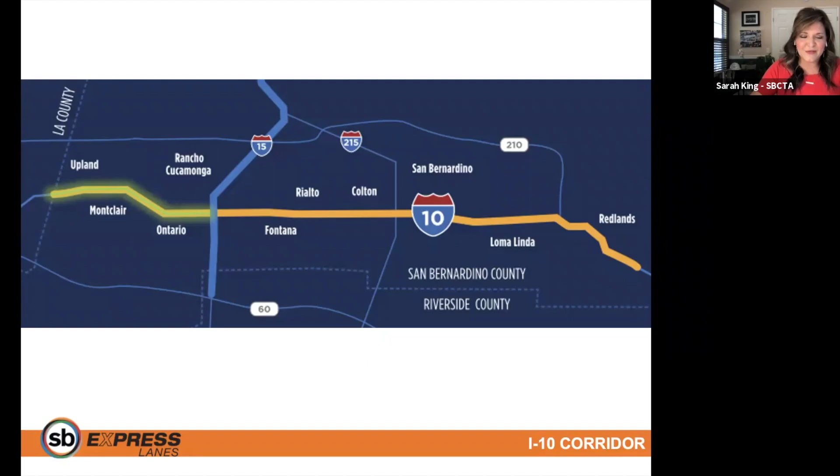Construction broke ground in spring 2020, and prior to construction starting, the I-10 looked a little bit like this: 4 general purpose lanes, an auxiliary lane to assist drivers with merging on and off the freeway between ramps, a shoulder, and 1 high occupancy vehicle or carpool lane.

The project will keep the current configuration with no changes to the 4 general purpose lanes, but we are adding 2 tolled express lanes in each direction and a shoulder, where the 1 HOV lane currently is. Construction is anticipated to be complete in 2023. Funding for the first phase has been secured from federal, state, and local resources, including Measure I, San Bernardino County's half-cent sales tax for transportation improvements.

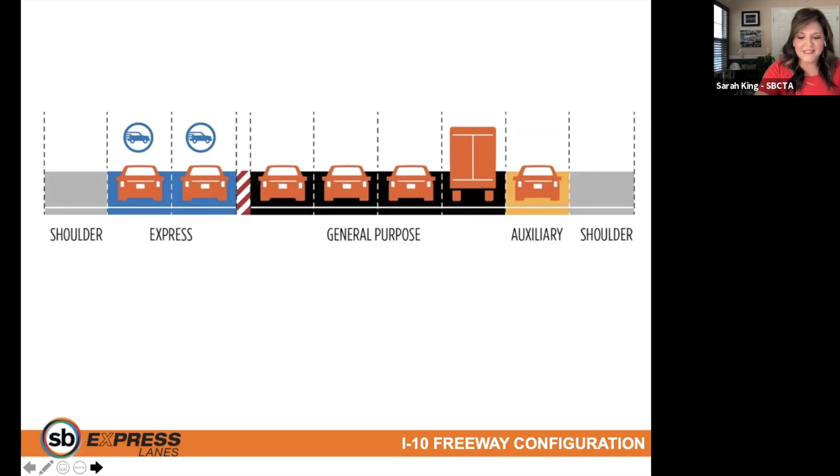Express lanes aren't new to Southern California. However, the I-10 express lanes will be the first express lanes within San Bernardino County.

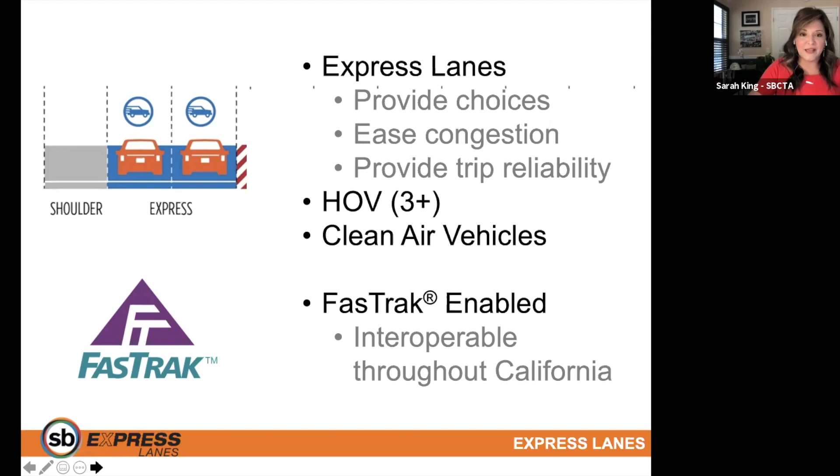Since spring of last year, crews have been hard at work building the first phase of the SB Express Lanes project. Construction occurs during daytime and nighttime hours and involves work in lanes, on and off ramps, along the shoulder to the freeway, and even local streets and roads.

For those of you who responded to our icebreaker poll before we officially started our presentation, the answer is 18, as you see here on the slide. There are 18 bridges within the 10-mile corridor that are either being replaced, widened, or improved to accommodate the widening of the freeway to add the express lanes.

Retaining walls and sound walls are also coming down and going right back up, and crews are rehabilitating the main line, and lots of utilities are being relocated. For those of you who responded for living within one of the corridor cities, you may have experienced lanes shifting or being narrowed, and even seeing construction vehicles entering and exiting the freeway as part of this project.

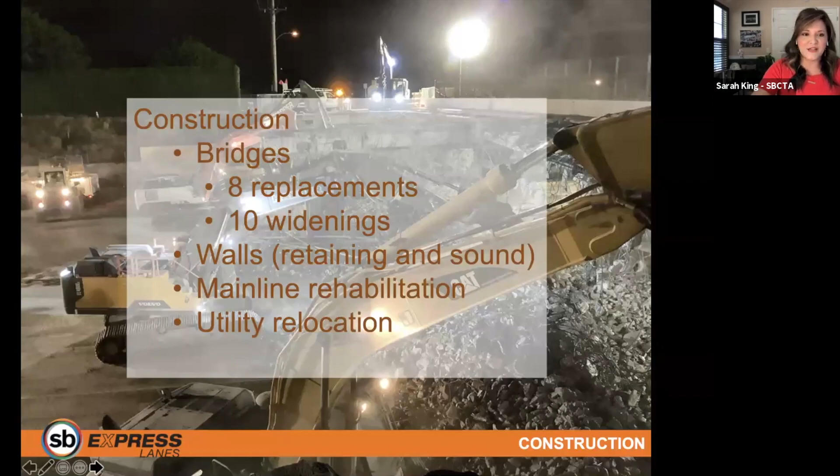Now, with construction progressing, the project team has scheduled a series of 55-hour weekend directional closures on eastbound and westbound I-10. These closures usually start Friday night at 9 p.m. and extend through early Monday morning, opening back up to the public by 5 a.m. They are scheduled for the next few weekends, except Easter weekend, and will occur over the next 2 years.

This allows crews to remove and repave portions of the I-10 freeway and perform major construction activities. Construction is dynamic and schedules may change, but all real-time closures and detours can be found on the project's Google map at go.sbcta.com/I-10corridor. We encourage you to plan ahead during construction.

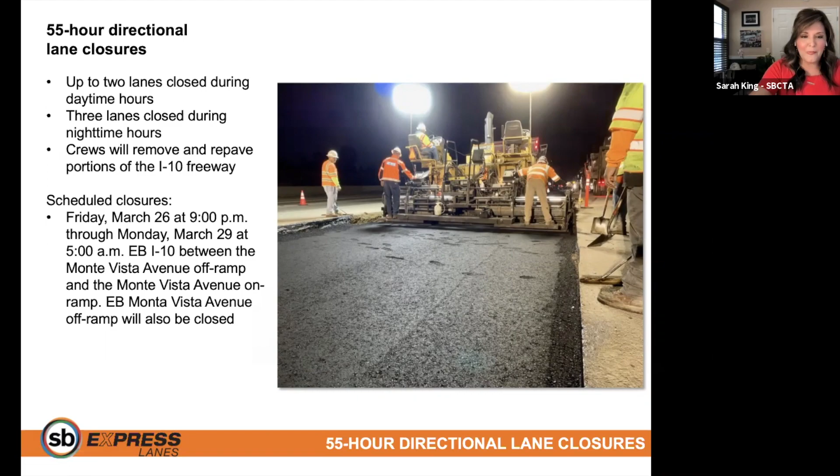Now, before we jump into our focus for this month's webinar, which is our bridges, I wanted to give you an update about our work on the retaining and sound walls and local street and lane closures. Because we're widening the footprint of the freeway, our crews need to take down and rebuild all the retaining and sound walls between you and the freeway. As part of this work, they are also relocating utilities and removing trees on several local streets adjacent to the I-10.

You may have seen a sign similar to the one in the photo here if you live within the corridor. While your commute on the I-10 may look different from week to week, it also might look different on your local streets, because of these closures and activities. These street and lane closures are needed to allow our crews to work safely and get through widening the freeway. But this specific work, as it relates to retaining walls and sound walls, takes place during weekdays only, during both daytime and nighttime hours.

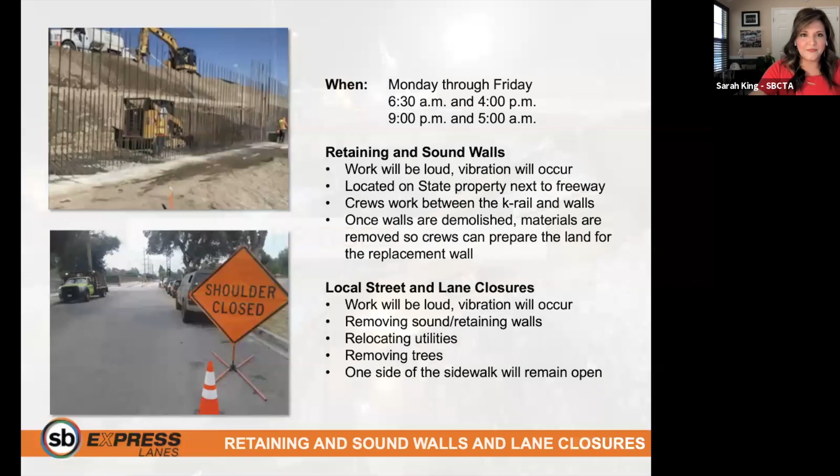So now we're going to jump into the focus of today's webinar, which is our bridges. Today, we're working on about 11 of the 18 bridges within the 10-mile corridor, and the next handful of slides will give you a glimpse into the life of this active construction project. Work on the bridges can be loud, and for those of you living within one of the corridor cities, you may feel vibration from the bridge activities during both daytime and nighttime hours.

Joining us is AJ Abascal from the Lane Security Paving Joint Venture, the team that is building the project on behalf of SBCTA. Hi, AJ.

Hi, Sarah. So we're going to make this a bit of a back and forth dialogue, and I'm hoping that you can help explain to our webinar guests, and those who will watch the recording after the webinar, what it takes to widen and reconstruct the bridges on this project.

Sounds great. So on our first slide we have closures and reduced lanes. Shutting down streets or freeways, we understand, can be an inconvenience to those who live nearby or are headed out the door to work. I myself have been detoured around a construction activity before, but help me understand, why do we close some bridges while others remain open but have reduced lanes?

Sure. So typically on this project, the bridges that we do close are the smaller ones. They're 2 lanes wide, 1 in each direction, serving the smaller local streets. The bigger ones, such as Euclid or Vineyard, have multiple lanes in each direction, serving some of the more major local streets, and those are the ones we try to keep traffic flowing through. So we'll do those in different phases.

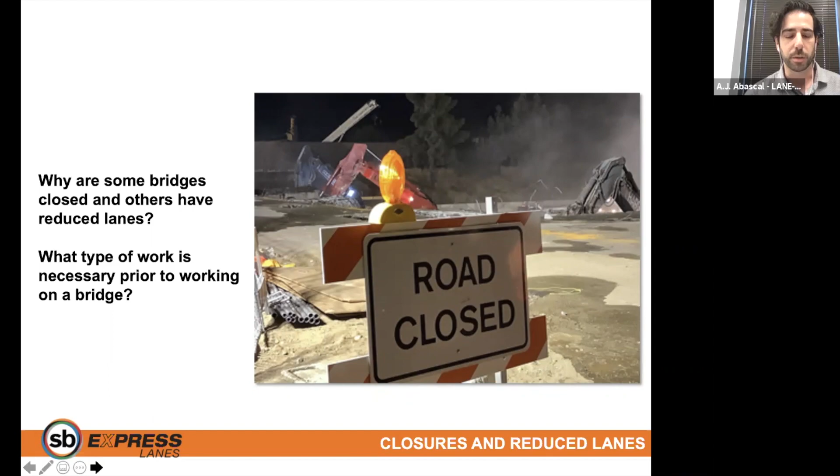So those are, in general, the things that we'd like to do as preparation for beginning any work on bridges. So definitely a lot of deliberate coordination and intent put into this before shutting it down.

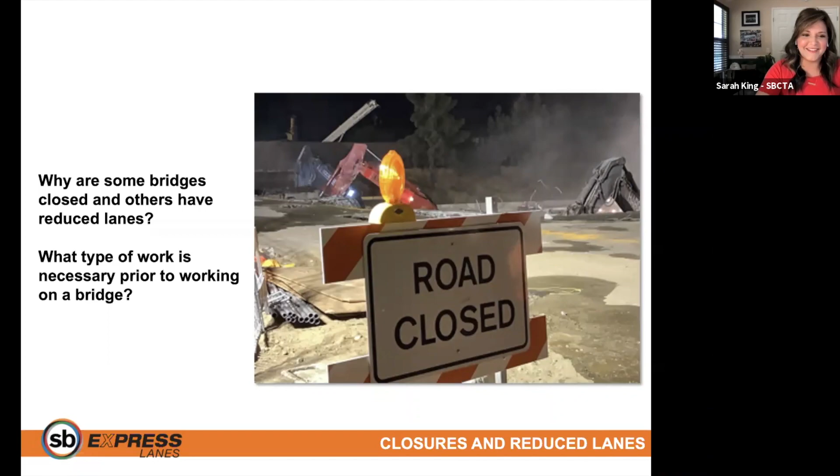That's right. All right, so that's a good segue because our next slide is utility relocation. So I think of utilities for my own home: water, power, cable, internet. Are these the same types of utilities that need to be relocated? The way I like to think about utilities is it's just any commodity that gets distributed from one place to another - water, gas, electric, cable, and so on.

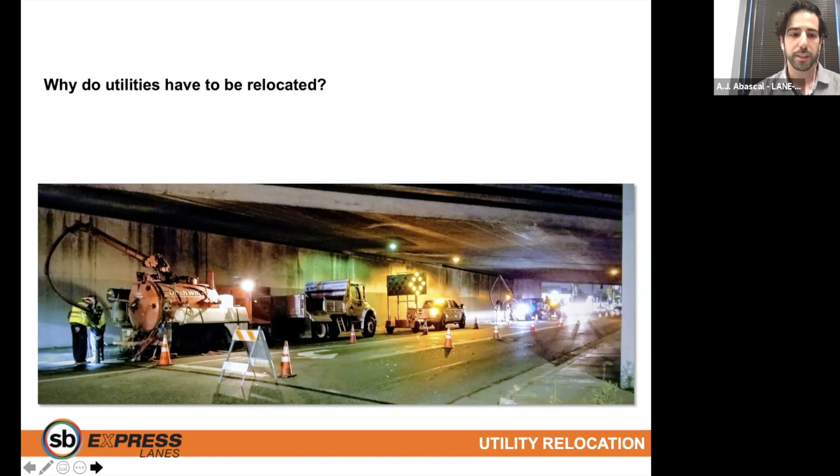Yeah, sure. So again, we start with our traffic control. This is more temporary, as it usually only stays in place for a few hours while we're doing the actual demolition of the bridge. But that's the first thing we want to set up, and it's basically to help detour or reroute traffic away from the demolition activity itself, for both the public safety and the safety of the workers.

Once that's in place, what we'll do is bring dump trucks loaded with material, earth, dirt, and dump it just underneath the actual bridge itself, basically creating a protective pad. That helps protect the existing pavement on the freeway so it doesn't get damaged, since you're talking about tons of concrete falling on the ground. So we want to keep that protected as best we can. That's what we typically start off with.

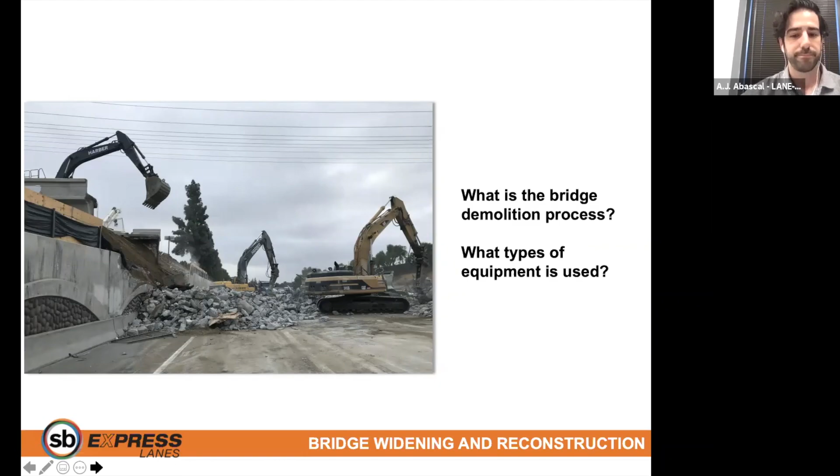Can you help explain some of the terminology here: abutment, bent, column, deck? An abutment, which you can see at the far end of the picture, is basically the foundation of the bridge, supporting the top on which drivers drive. Abutments are only at either end of the bridge, whereas bents are similar but in the middle. Depending on the length of the bridge, you may need multiple bents to support its weight and the traffic. On this project we have either 0 or 1 bent per bridge, but elsewhere you could see multiple, just depending on bridge length. Columns are basically part of the bent system and help support the bridge between the abutments. The deck is basically the surface of the bridge that traffic drives on.

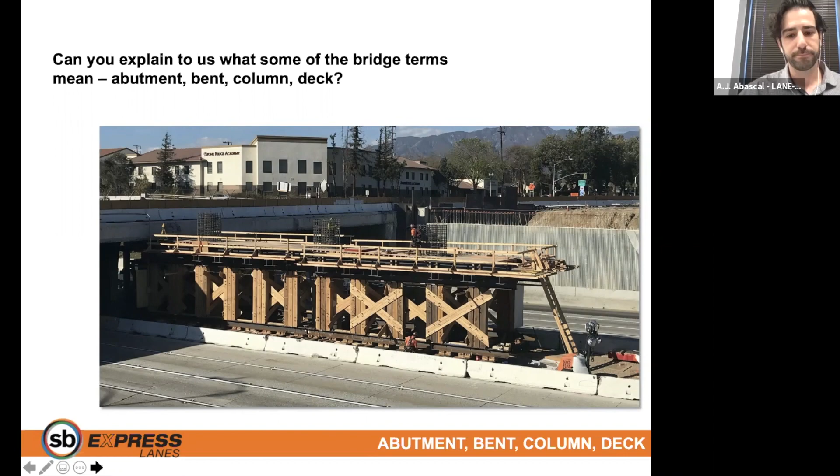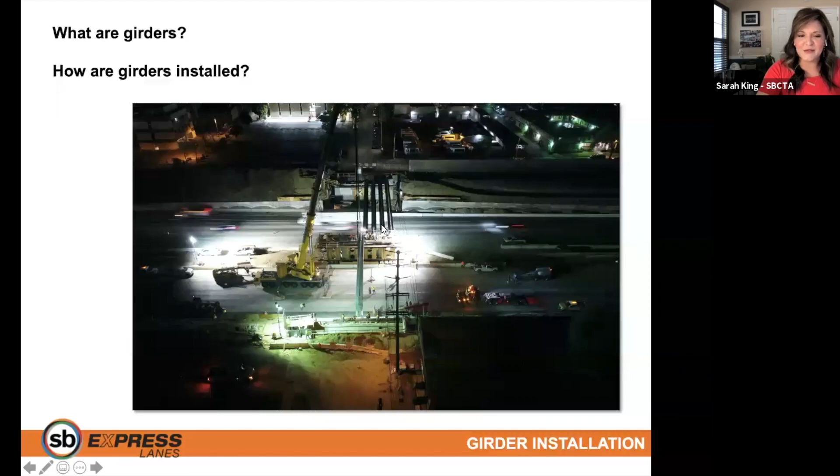So testing my knowledge on the slide you just described for abutments — the abutments are here on the outside of the bridge, correct, and our bent is here in the middle? Yes. And these concrete beams you mentioned are the girders? Yes, ma'am. Great, thank you.

Once that's done, we do the deck pour, which usually takes a night or two for bridges this size. It's also quite tedious — you want to be really careful because you're creating a nice, smooth, drivable surface. If you're not careful, that's why we're so careful doing that kind of thing. So there's precision needed for the end user.

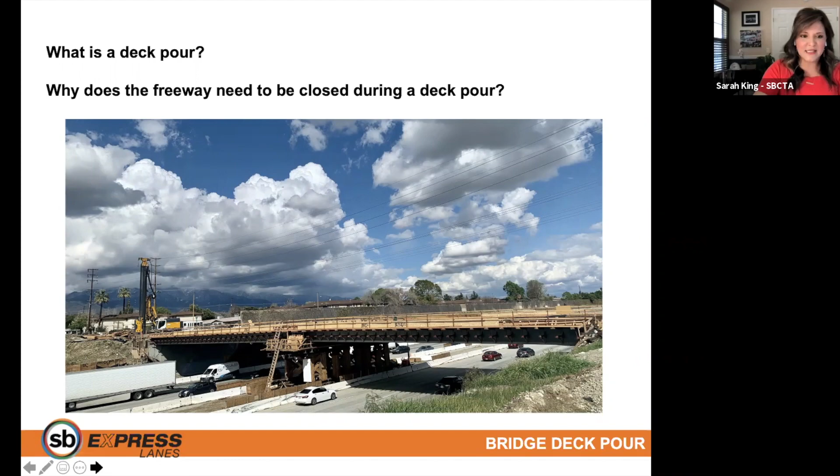So our next few slides, we're going to give our webinar guests an update on some of the bridges. Thank you, AJ, for explaining the various stages of taking a bridge down and building it back up. I know we made it look pretty simple in just a few slides, but there's obviously a lot of crews, coordination, and equipment needed. I'm hopeful this explanation helps explain why freeway projects take so much time and coordination, and sheds some light on why so many activities occur at night.

Thanks again, AJ. So again, the next few slides are just providing an update on some of our key bridges we're working on. Crews continue to build the new Sultana Avenue Bridge over I-10, which started last year. Crews will pour concrete for the bridge tomorrow night, starting Friday night, March 26th from 11 p.m. to 7 a.m. The westbound I-10 will be closed between Vineyard Avenue and Euclid Avenue.

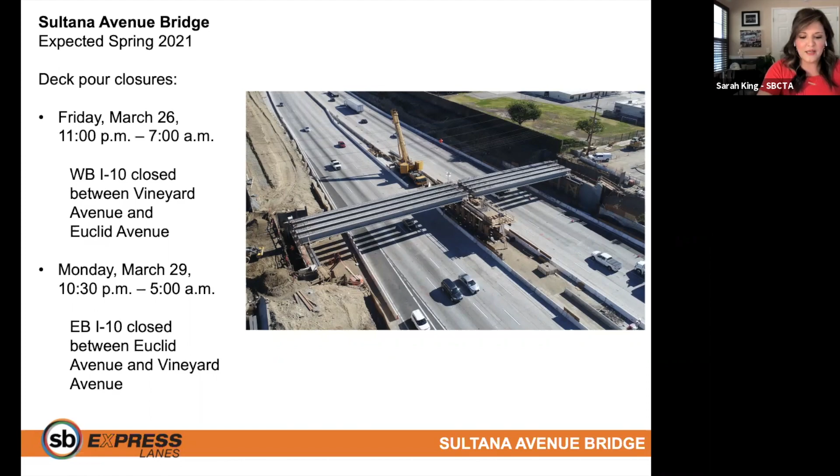And then on Monday, March 29th, from 10:30 p.m. to 5 a.m., the eastbound I-10 will be closed between Euclid Avenue and Vineyard Avenue. So motorists will be detoured off the freeway. If you're planning to travel during these times, please be on the lookout for any detour signs.

Work on Euclid Avenue began in mid-May 2020 and will last approximately 18 months. Crews demolished the east side of the bridge last year and are working on rebuilding the northbound lanes. Daytime and nighttime activity includes building the bridge supports, which is what you see here on the screen. In April, crews are scheduled to do the deck pour, like we're doing on Sultana that AJ just alluded to, on the east side of the bridge, which will require closures, and more information will be provided as we get closer to that date.

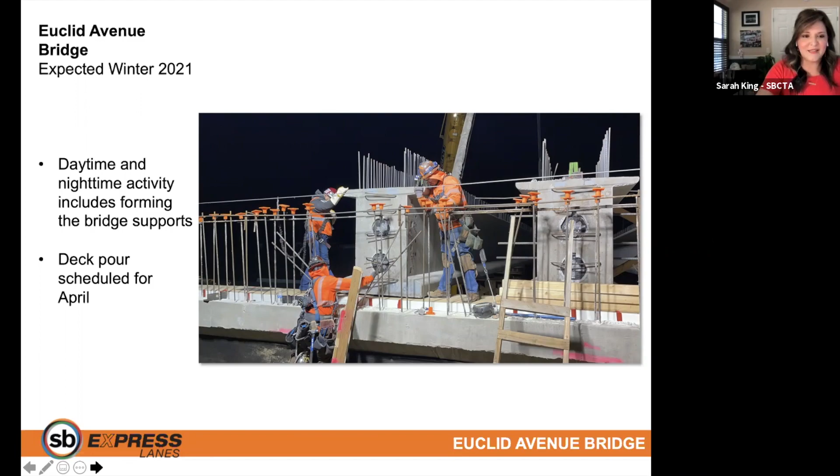So we will end our bridge highlights section with Vineyard Avenue over I-10. This bridge will be replaced in a two-phase process. The east side of Vineyard Avenue over I-10 was partially demolished in early March, and that's the photo you see here on this slide. Construction will last approximately 18 months, expecting to be open to the public in fall of 2022. Daytime and nighttime activities include installing temporary support structures, drainage, and earthwork.

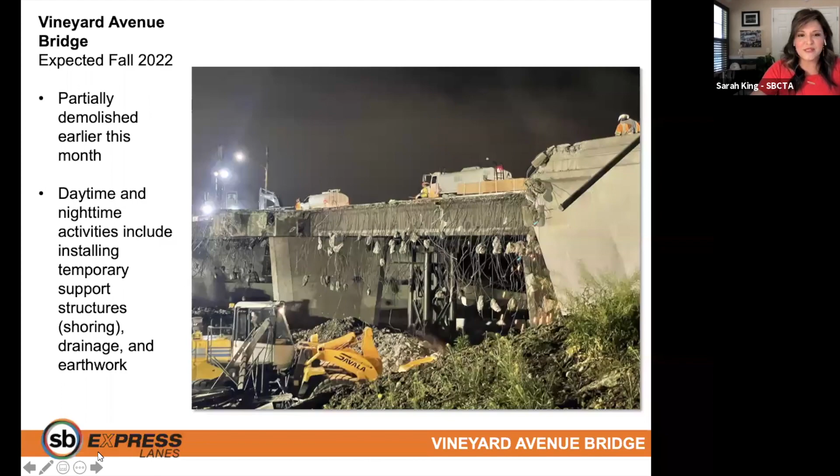So as you can see, these bridges take a lot of time and precision to demolish and reconstruct. We thank you for joining us today to learn more about these bridges, but also thank you to those who live and travel within the corridor for your patience throughout the project.

So we are in the home stretch of our presentation, just talking about our community outreach. We want to make sure you are aware of how to learn more about our project and how to reach our team. We're going to ask another poll question here, asking the folks joining us how do you receive our project information? This question is multiple choice, so you may be receiving information in more ways than one, but hopefully you're receiving information on the platform that works best for you.

Our information across the platforms is consistent, and if there's a closure, we want you to be prepared. And if there's a major activity near where you live, we want you to be informed in advance. But all of this information is provided in a variety of ways to ensure you select the platform that works best for you. So we have a robust website,

gosbcta.com/I-10 corridor, where you can sign up to receive our weekly construction alerts. We send these out on Friday afternoons with the upcoming week's construction activities, so you're prepared for the week ahead.

We offer a text alert program to receive alerts. You can text I-10 Express Lanes to 31996. I sign up specifically for text alerts for specific information that I want to be sure I don't miss. It might be the same content your neighbor is receiving via email, you're just getting it as a text alert.

And then we're very active on social media and encourage you to follow Go SBCTA on Facebook, Instagram, or Twitter. You may get to see some bonus footage like what you've seen here today during our webinar of the construction behind the scenes. Madison, can we take a look at our poll results?

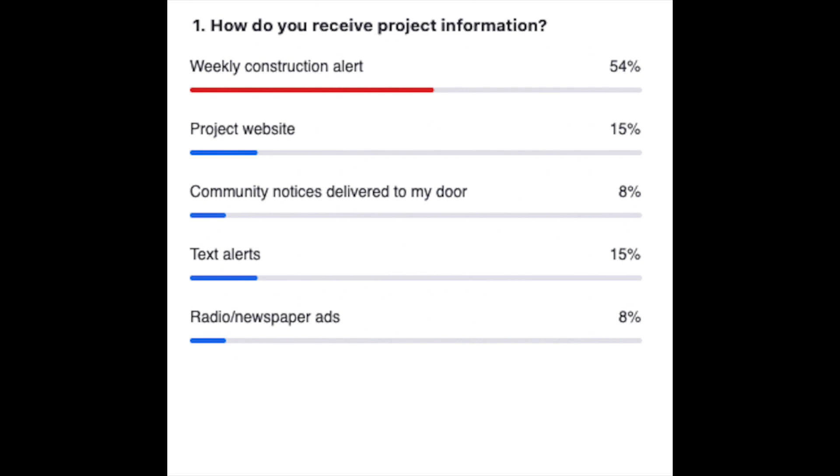Okay, thank you. So everyone, it looks like the majority of people are receiving information via our construction alert. I'm so glad to see that. And then as well as our project website and community notices and text alerts. So thank you for that, Madison.

So here's a snapshot of some of the collateral we share, though it might be redundant for those of you already receiving it in some fashion. On the far left is a community notice flyer that we distribute door to door to residents in the vicinity of where a specific activity is taking place.

This one happens to be specific to a Mountain Avenue partial bridge demolition, so any residents or businesses right within the immediate area would have received this on their doorstep. The center is an example of our weekly construction alerts, which we send out Friday afternoons with a look ahead for the next week, packed with valuable information about key activities, bridge work, freeway lanes, on and off ramps, and local streets.

If I can direct your attention to the bottom gray box, which we've also zoomed in on at the top right of the slide, it says learn more about I-10 Express Lanes construction in your city. We have three green buttons: Montclair, Ontario, and Upland. If you live in one of these cities and click one, a city sheet will appear.

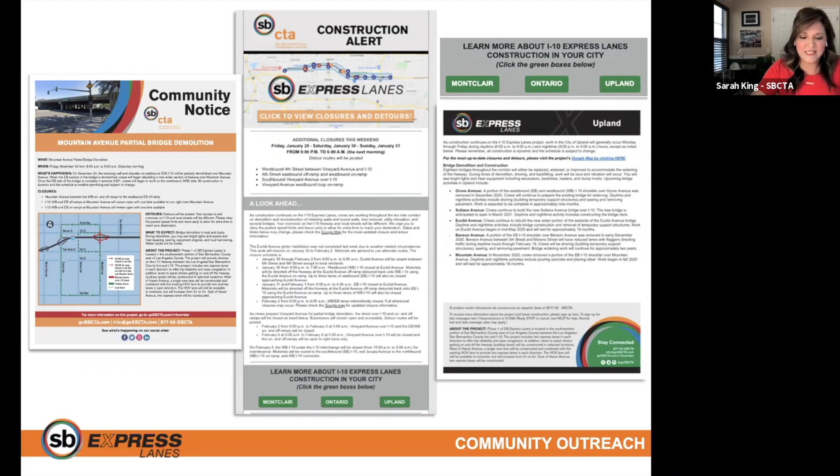With a project of this magnitude, and seeing all the nighttime shots of our construction activity on the bridges, you can imagine the number of freeway, lane, and road closures that take place every day. So we encourage everyone to always plan ahead, allow extra time to reach your destination, or seek alternate routes to avoid the construction area during this time.